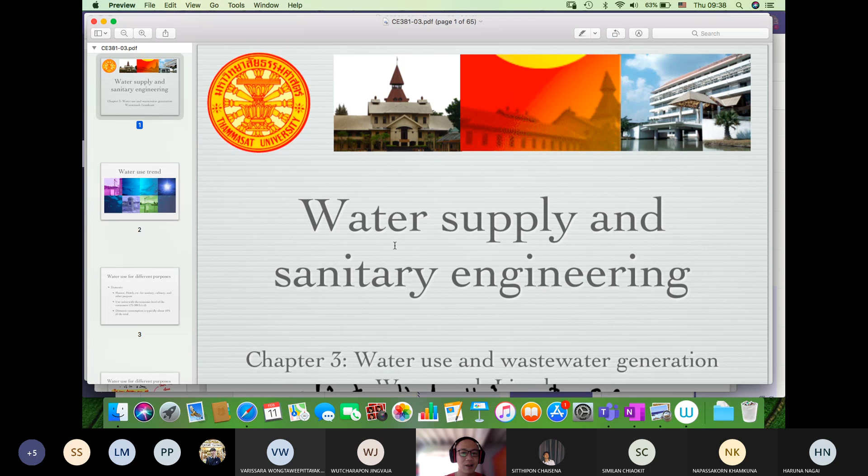...waterborne disease. And this week we're going to the next chapter. We'll be talking about water use and wastewater generation. So I'm now on the slide of chapter 3. Hopefully your screen is showing the first page of my presentation, chapter 3, water use and wastewater generation.

So water use and wastewater generation both have a very close link with each other, because whatever the amount of water we use, at least 60–70% will become wastewater. There may be a loss due to some activities. Sometimes we're washing our car, sometimes we're watering plants. So that is the amount of water we lose. But anyway, in general, 60–70% becomes wastewater.

Let us begin with water use. Water use trend. As we know, communities use water for several purposes. We use it in our house, which is called domestic use, at the hotel or even at the factory. For the toilets, wherever they're located, we consider this water as domestic water use, because this part is used for human activities, not for industrial activity or the manufacturing process. So we consider all the water used for human activity as domestic water use.

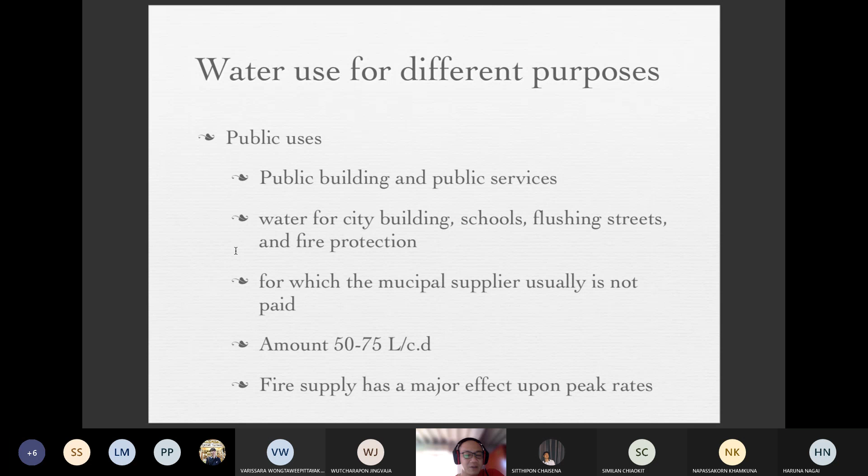Public use means the water used in public buildings or public services. For example, water for city fire protection, street flushing and cleaning, or public buildings like a bus terminal or the airport. Water use in public places may account for 50 to 75 liters per capita per day, including fire protection.

Loss and waste are part of the water that we produce. During transportation, sending it through the piping system, there may be leakage, so there will definitely be some loss. Every city all over the world has some loss, but the amount of loss and waste depends on how they maintain the distribution system.

Recently I met people from the waterworks authority. They said in Bangkok and the suburban areas, the waterworks authority loses as much as 30% of the water produced due to leakage. 30% is quite a lot. But some cities with a good public plumbing code and good maintenance of the piping system may reduce this to less than 20%. In Bangkok, there are 4 or 5 large water treatment plants, and the biggest one is located in Bang Khen. We generally call it the Bang Khen water treatment plant.

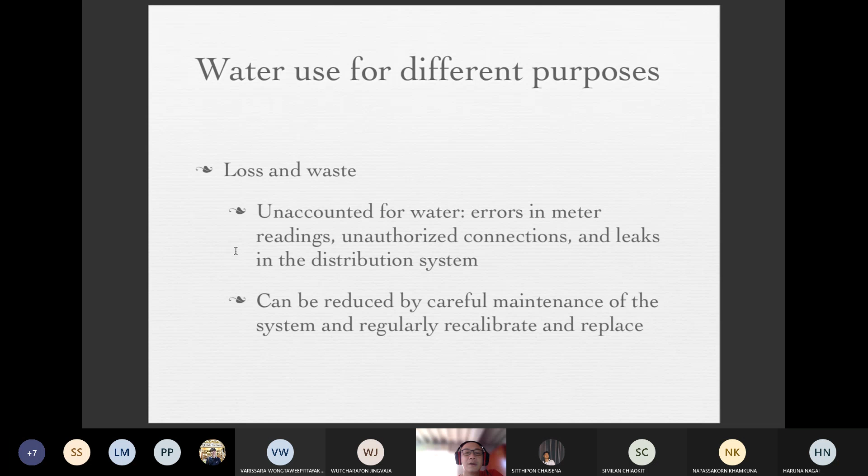Factors affecting water use. As I mentioned, there are many factors that could affect the behavior of the people who live in the communities. The amount of water use depends on the size of the communities and whether there is some industry present in the community areas or not. The quality of the water. So if the quality of water is good, people tend to use more water in their daily life.

But if they just turn on the tap water valve and then they get color and some turbidity in the water, they feel the water may be unsafe for consumption. So in that case, people try to avoid using the water, and we see less water use in their daily life. Its cost, of course: if the community charges a higher price, people try to use a smaller amount of water.

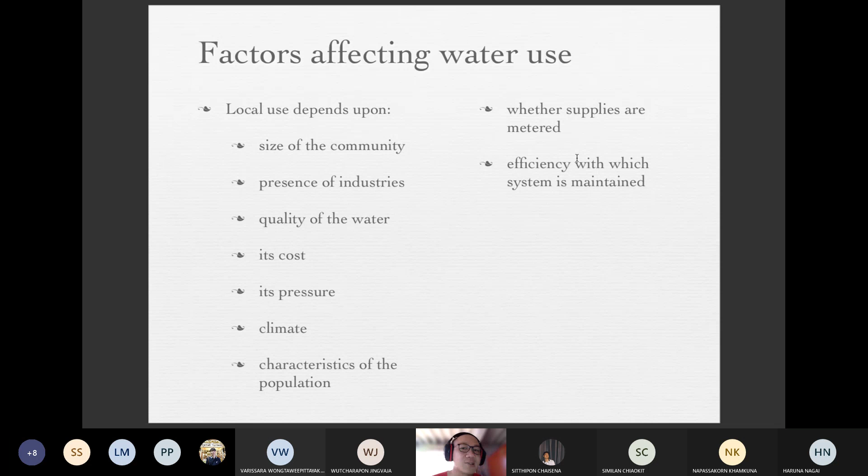So this is one of the strategies that could enhance people to use less quantities of water, if there's a meter. The other thing is the efficiency with which the system is maintained. If we do proper maintenance, we can minimize loss and waste, reducing the amount of water that leaks due to poor piping conditions. These are all factors that may affect water use.

If you look into a community, for domestic demand, people may use up to 300 liters per capita per day. This is just one example; the percentage of total may vary depending on the activity in the community, and it may vary from one community to another. Industry may use up to 160 liters per capita per day, and loss and waste may be just 8% of the total. So the entire water use per head for this community is 670 liters per capita per day, but only 300 for domestic use or human activity, not much higher.

Size and characteristics of the population, as we already mentioned. In the household, people mainly use water for toilet flushing and showering. If you take a bath, it may be less than 30 liters per capita per day, but if you take a shower, it may be 30 or sometimes even higher. Cooking is only 5 liters. For drinking, you are recommended for good health to drink at least 3 liters of water per day, equivalent to 2 big plastic bottles, since one big plastic bottle is 1.5 liters. So you should finish 2 bottles per day at least.

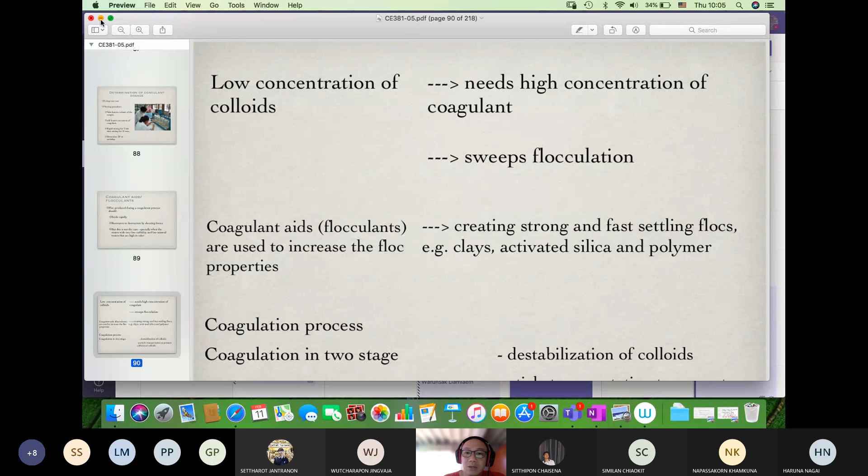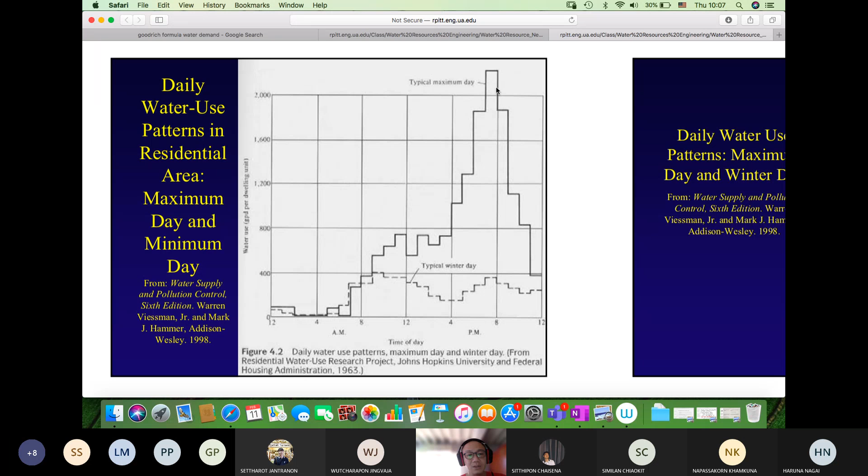But in the winter, the water use pattern is totally different. People use less than 400 gallons per dwelling per day, but the peak also occurs between 7 to 8 p.m. in the evening, though the demand is not as high as the maximum day, which I assume occurs during the summer when the temperature is high and people tend to use more water. This is the daily water use pattern.

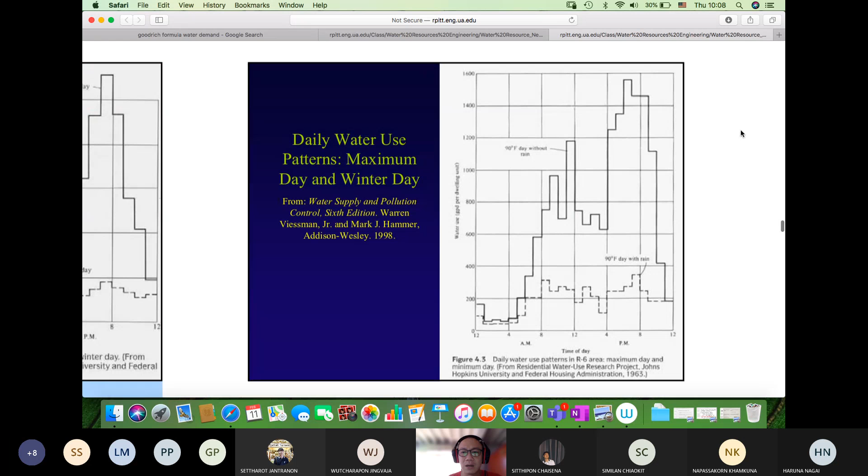What about this one? This is also taken from the same textbook. In fact, I have this textbook, but as you know, I'm not in the office now, so I had to search for this figure from the internet, and I finally found this. It is also a daily water use pattern, but it shows the water use in winter and in the rainy day.

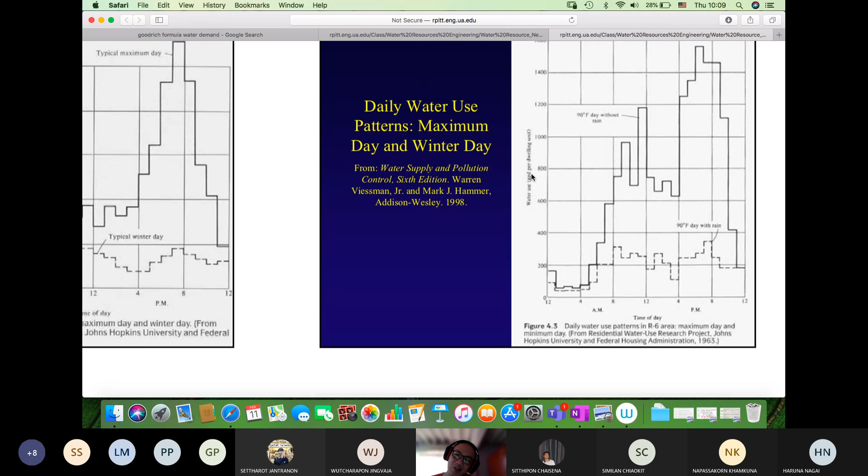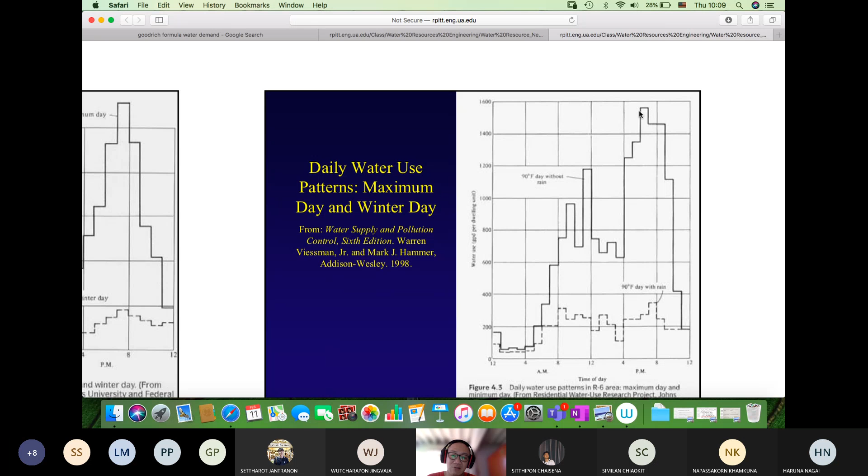The water used during the rainy day is just the same as during the winter. With the rains, people use less than 400 gallons per dwelling per day. But if there's no rain, it may go up to almost 1,600 gallons per dwelling unit per day. So these are somewhat different, but anyway, you will see there's a variation from the lowest to the highest, and it goes down again during the late night and early morning. So the water use pattern in communities will always be like this.

So according to this, you see some variations. There's water use variations over the period of 1 day, over 1 week, over 1 month, and over 1 year.

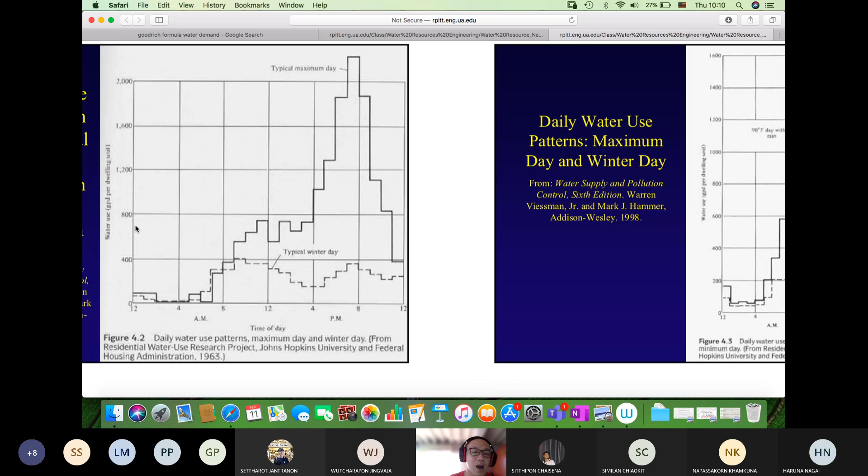So as the water variation is aware, what we are really interested in is the average use or the average demand. So how can we estimate the average demand according to this figure? What does this figure tell you?

Over the period of 24 hours, within 1 day, the clock begins from 12 a.m. in the night time, and then ends at 12 a.m. again the next night. Anyway, it shows the water use variations over the 24 hours.

So if you want to take the average flow over the period of 1 day, you have to take the summation of all the flows that occurred in these 24 hours, and then divide it by 24 to get the average demand or average flow rate. In fact, the water use or demand is the flow rate. If you take the summation of the flows divided by 24, you definitely get the average demand. That is called the average.

But for the maximum demand, which occurs at around 7 to 8 p.m., we generally call this the peak demand or the peak flow. But at 4 a.m., nobody used water, or if they do, it's just a very small quantity. So here is the minimum demand.

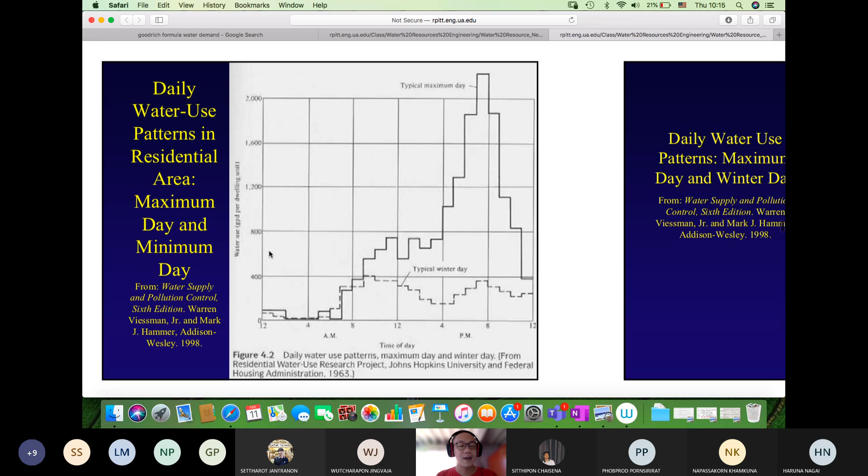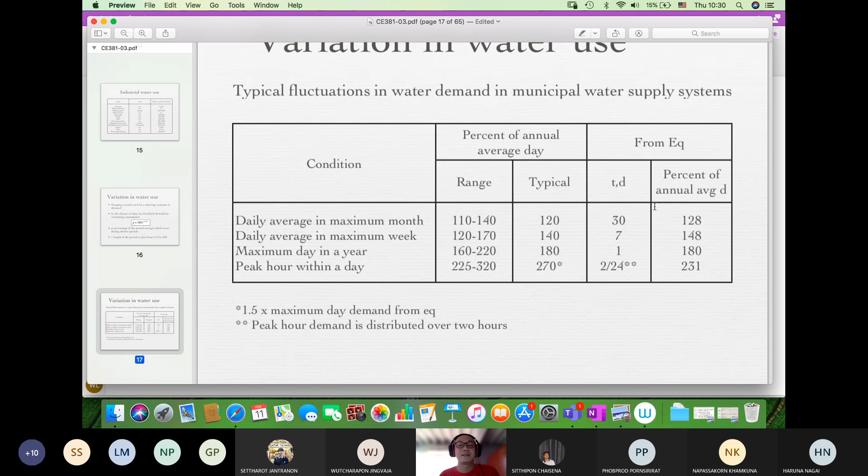Another thing is whenever we estimate the water use, we have to consider the water that we have to store for fire protection. The National Board of Fire Underwriters in the US has launched the criteria. So as I mentioned, the criteria is not legally enforceable. It's not the standard. So criteria may be obtained from the statistical record. But anyway, from the records, this organization, the National Board of Fire Underwriters, developed these equations and how we can make use of these equations.

So we use this equation to estimate the demand required in the downtown business district. You can estimate the water use for fire demand by using this formula. Again, the same as the Goodrich formulas, these formulas are not homogeneous equations, so you have to be careful about the units. How can we use these equations? This equation is the fire flow, the fire demand. Q here is the fire flow, so the fire demand over 24 hours.

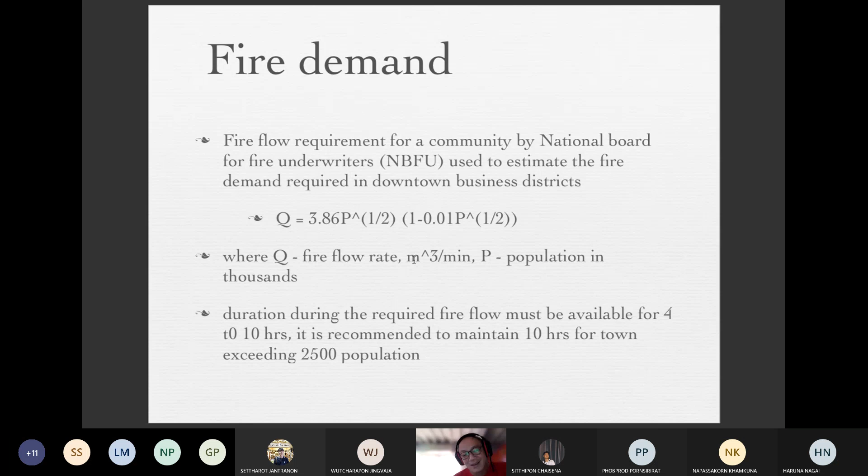This equation is used for fire flow estimation in the community. You substitute the population, then you get the flow rate. On the other hand, in a building, as an environmental engineer, one day you may have to determine the amount of water used to control fires in the building. For a building, it's not with respect to the population in thousands; there's a different way of determination.

Mostly the amount of required fire flow depends on the total floor area. If we have more floor area, we will have to store more water. So this is how we can determine the fire demand within the building. But be careful, the unit is cubic meters per day for the fire flow. The total floor area is given in square meters. C is the coefficient related to the type of construction.

If our building is made from wood, then C should be equal to 1.5. If it's ordinary construction, you use only 1. For non-combustible construction, C would be 0.8, and for fire resistive construction, C could be 0.6 only. So it depends on the type of construction and the materials used. For the one which easily catches fire, we have to provide more water. That is why C goes up to 1.5. So this is fire flow estimation.

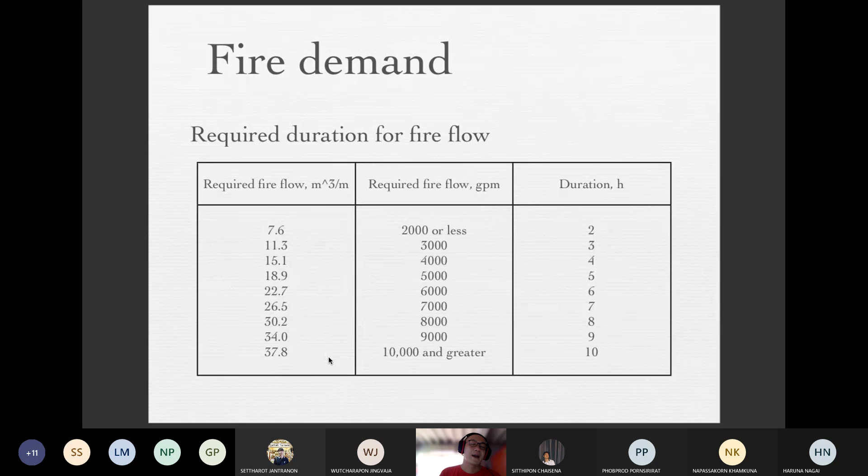According to these two aspects, the Goodrich formula and the fire demand, I'd like to discuss the example. Let us begin with example 3. In example 3, determine the maximum water demand during a fire if it is assumed that a community with a population of 12,000 has an average consumption of 600 liters per capita per day, and a fire flow dictated by a building of ordinary construction. For ordinary construction, the coefficient related to the type of construction, C, must be 1.

And then what is next? The information provided by this example: this building is basically a 6-story building. Each story has a floor area of 1,000 square meters. The fire flow must be maintained for 10 hours. So estimate the average domestic demand, the maximum daily demand, and maximum rates, including the fire demand. Okay, we'll go through this one by one.

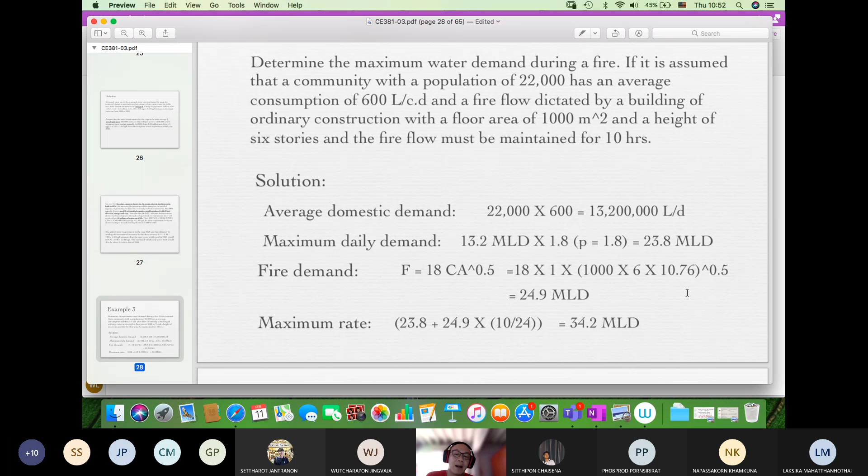Then for the fire demand, if I just pick this equation to find the fire demand, you will find the fire demand as high as 24.9 million liters per day, quite a lot for a fire demand. We have 6 stories. Each story has 1,000 square meters, and 10.76 is nothing but just the conversion factor. Finally, we get the fire demand approximately 24.9 million liters per day.

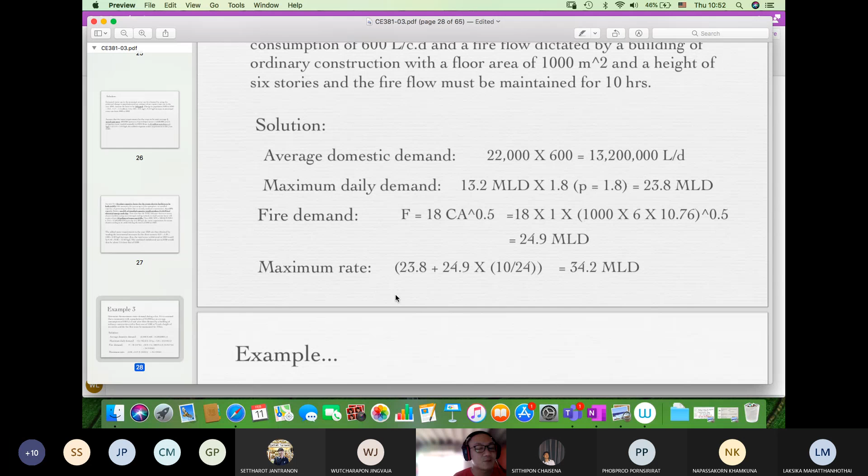And to determine the maximum rate, it must be equal to the maximum daily demand plus the fire demand. The maximum daily demand is clearly 23.8, but the fire demand you have to manipulate, as this number is with respect to a 24-hour fire continuing to occur, but in fact we can actually control it within 10 hours.

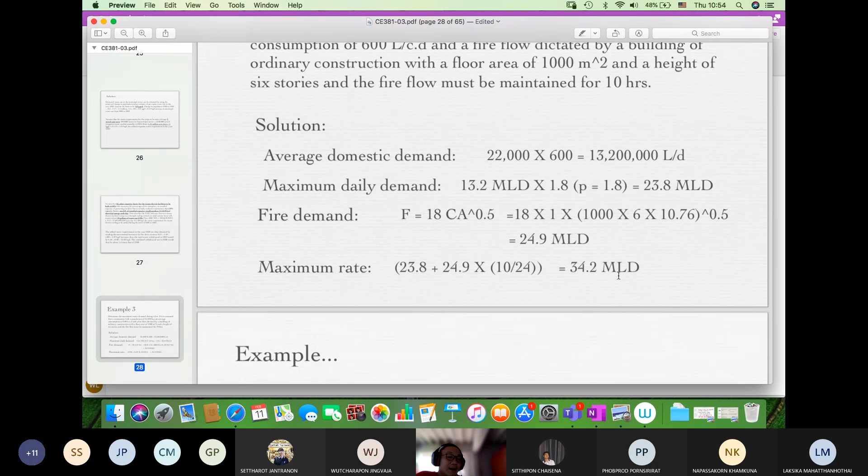That is why, according to this question, the maximum rate is equal to 23.8 plus 24.9, but this 24.9 you have to reduce somehow, because finally the maximum rate is 34.2 million liters per day. Okay, so these are the examples related to the Goodrich formula and also the fire demand or fire protection. Do you have any question regarding this example before we move to another example?

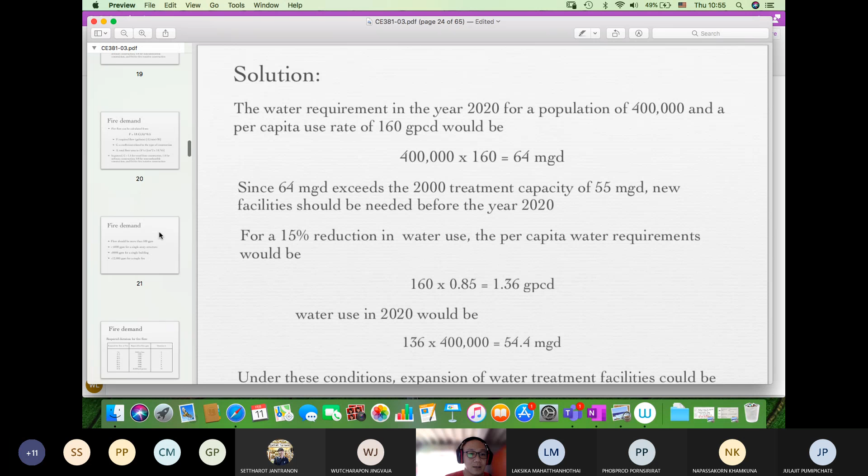Any other question? How did you get 10.76? 10.76 is the conversion factor. As we are using these formulas, fire flow is given as gallons per minute, and the total floor area must be in terms of square feet.

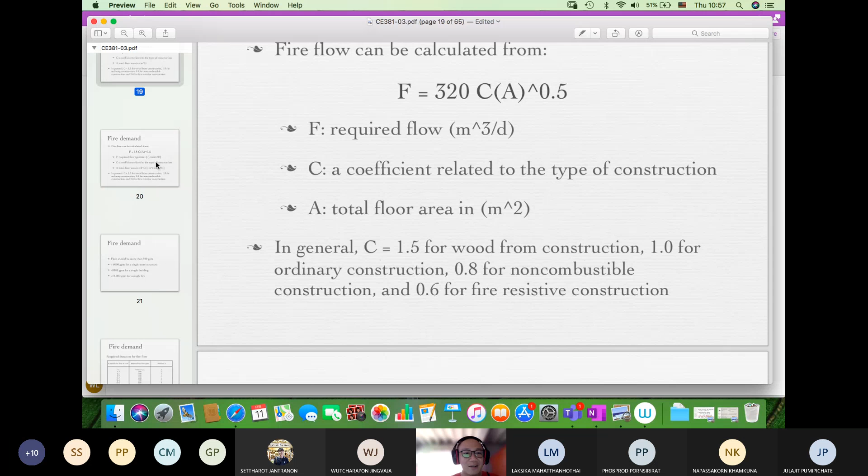Each floor consists of an area of 1,000 square meters. Multiplied by 6 because we have a 6-story-high building.

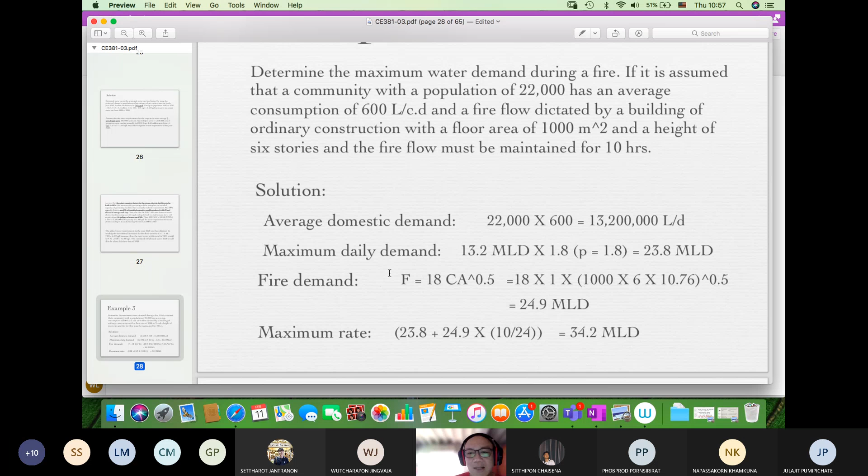So after conducting the lectures for almost 1.5 hours, at least somebody has listened or paid some attention.

Okay, then we move back to the first example. So the first example,

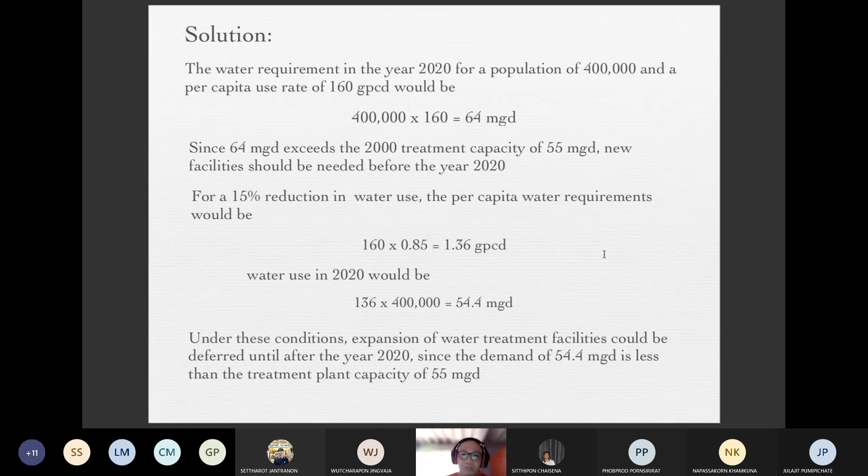Okay, you may find out the solution somehow. This is the solution to example 1. Do you have any questions regarding this question? This question is quite straightforward. If no, then let us move to another example. Example 2 is also another situation.

Someone has not turned off the microphone. There is noise. Okay. This period, it's election period again. The local municipality plans to hold elections by the end of March, and this time many announcer trucks move around to encourage people to vote for them. Sometimes it's very noisy. Sometimes it moves very close to my place. So it's really disturbing.

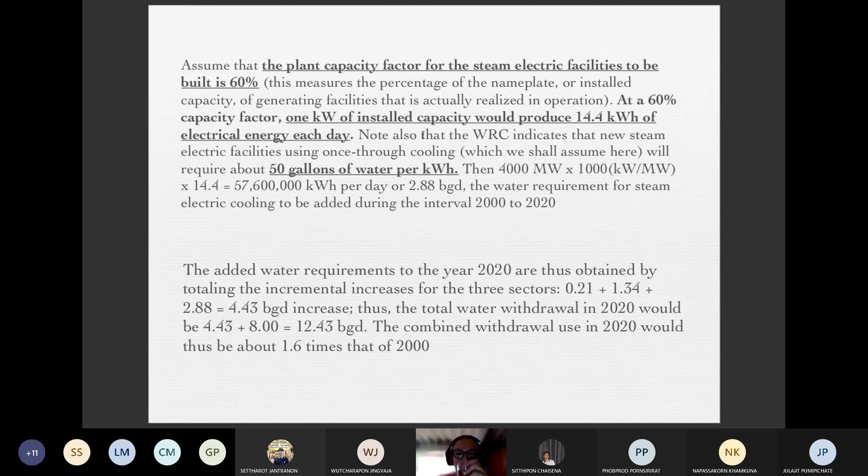Now, another example, probably you can try it as homework. Once we finish this chapter, there will be one big assignment containing several problems you can practice. So if we could finish this chapter today, I can distribute the assignments.

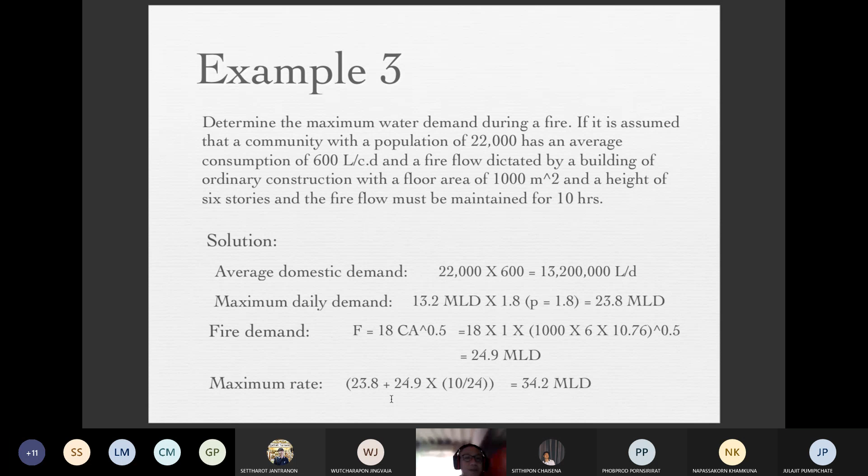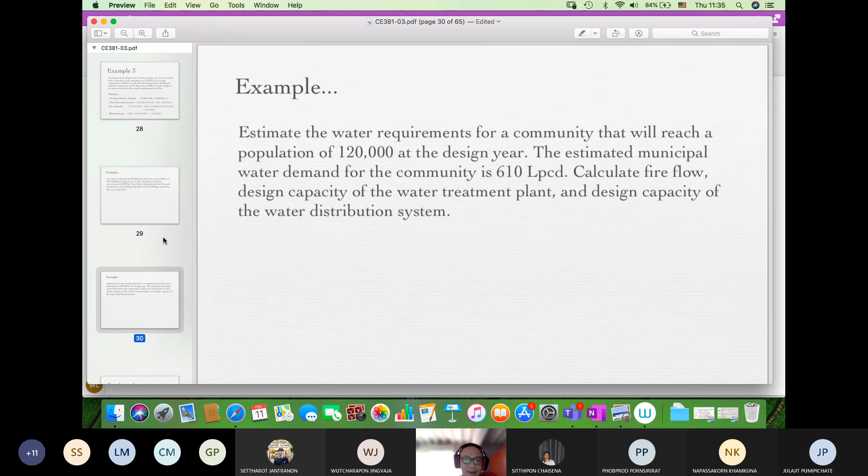Two other examples, I expect you will do it as homework. Okay. So if there's no other question, then we move to the next topic.

In this topic, population forecasting. You may realize, according to this 3-4 example, the information about the population number is important because we mostly have the per capita use, but we don't have the number of the populations. So if we want to predict the number of the populations in the future, this is the procedure we're going to move into.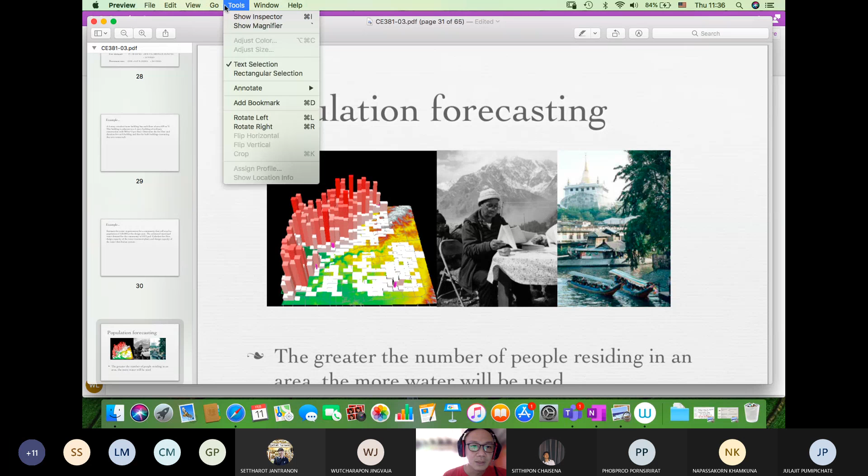For the population forecasting, the procedure that we are going to talk about in this chapter is only used for estimating the population for designing the treatment facilities, or maybe for designing some infrastructures in the community. We don't use this method to predict the real populations in the future, because predicting the real populations in the future involves numerous factors. We cannot do something like predicting the population of Thailand in 2030 with this method, but we use this one just for designing the treatment facilities, or sometimes other public infrastructures.

So okay, for population forecasting, populations of course affect the water use: age, levels of education, social background, fields of employment, religious belief. Some religions pray several times a day, and before praying they have to wash their hands, wash their feet. They may consume more water compared to other religions, but it's not much. Anyway, there's a different way of using water.

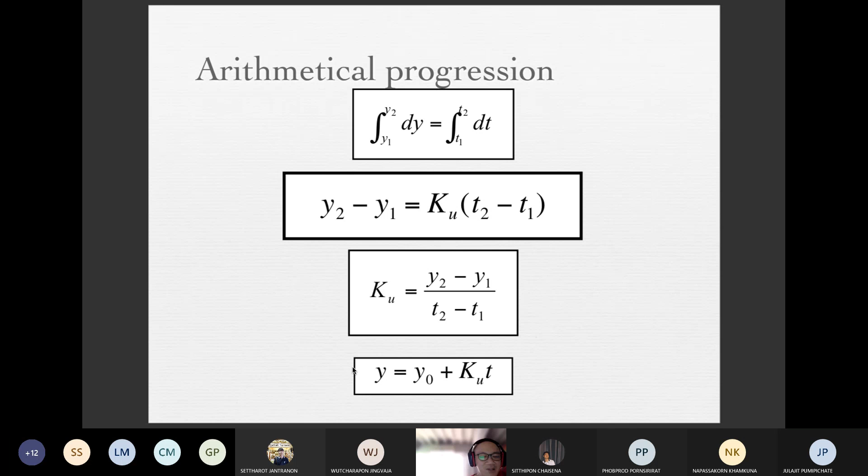You will get something like this: the population in year y is equal to the population in the present year plus k, a constant, multiplied by the time difference.

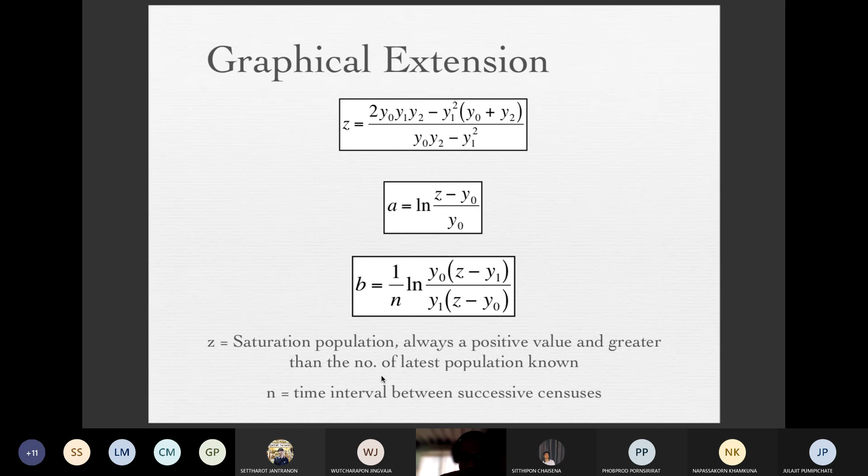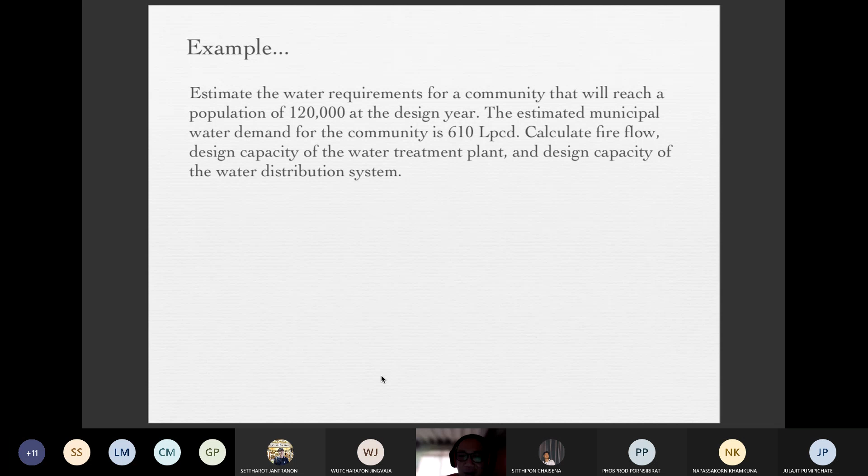It as an assignment, how many questions - 3, right? One, two - these two questions are really simple, but this one, but the third one is

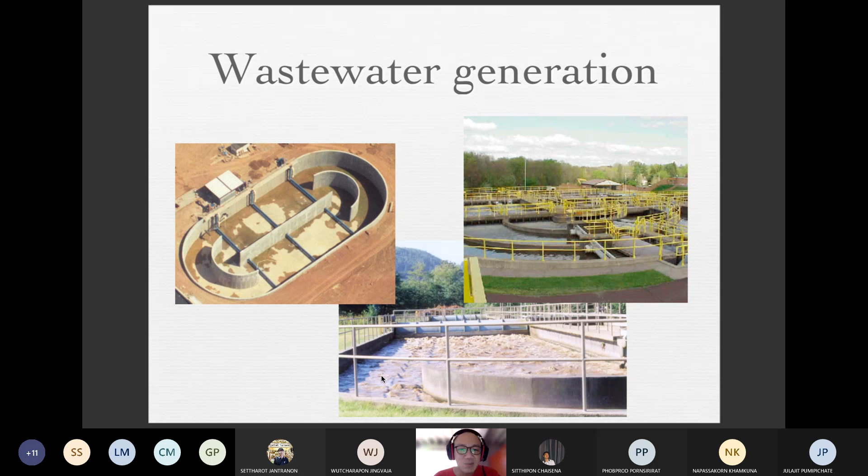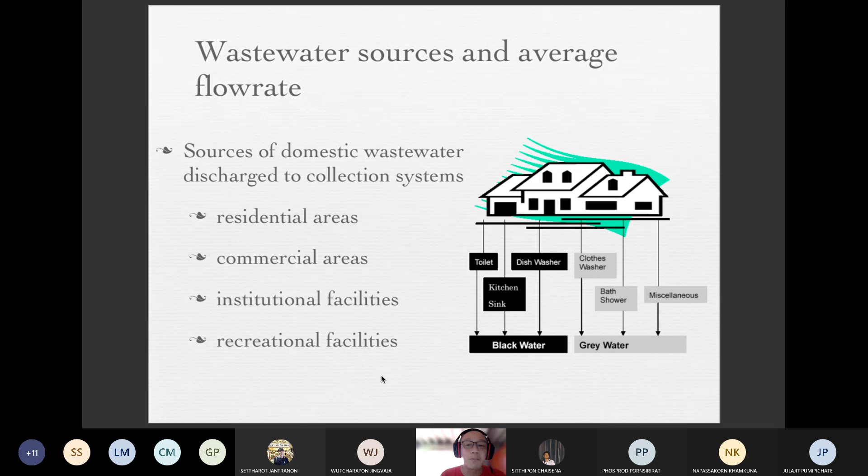Okay, so we are nearly finished this chapter, so let us finish within 10 minutes. The last topic is the wastewater generations, so I have mentioned about the wastewater generations several times. One, this aspect I have already talked about it in the last part of the first chapter if you still remember.

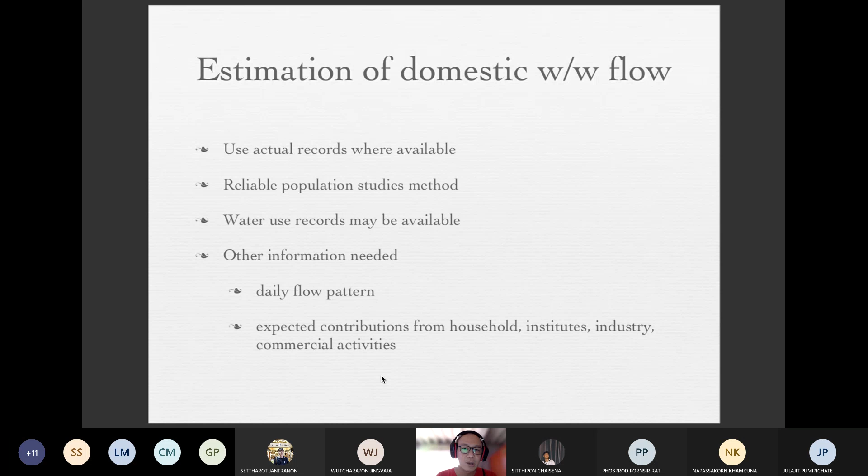But anyway, what I'd like to add from chapter 1 is for the wastewater generation. So it's really, it has very close link to the water use pattern. As I mentioned, about 60 to 80% of water becomes wastewater. And in terms of the water use pattern, as I told you, if we use like this, if the water use pattern is just like this, then what about the wastewater generation?

So wastewater generation is just only 60 to 80% of the water use. So wastewater may be like only 60-80%, so not as high as the water use. And the other thing is you will see the time lag.